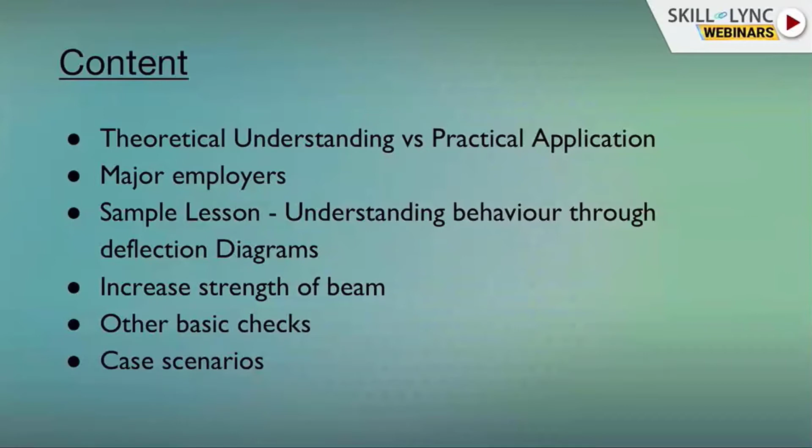So what you go through in the exam syllabus is really very different from what is required in industry. In exams, you get a simple portal frame, you get the loads on it, and you derive forces.

Whereas in structural engineering, you will need to create the geometry first. You need to understand the loading pattern, and create a geometry which is more efficient in transferring the load. It is more about understanding physics, because all the calculations will be done by software like StaadPro.

For superstructure and for foundation, we have Mat3D and various other software. So what I want you to understand is the approach of imagination and the physics.

In academics, you would have learned methods like the slope deflection method, moment distribution method, and Kani's method. I'll tell you straight away, none of these methods are used in practical application. What you need to understand is the basic concept of how every element behaves, how it responds to loading, and how load transfer happens.

So this is what I'll be covering. I'll at least try to clarify the basic approach. Of course, I won't be able to go into detail in these 45 minutes.

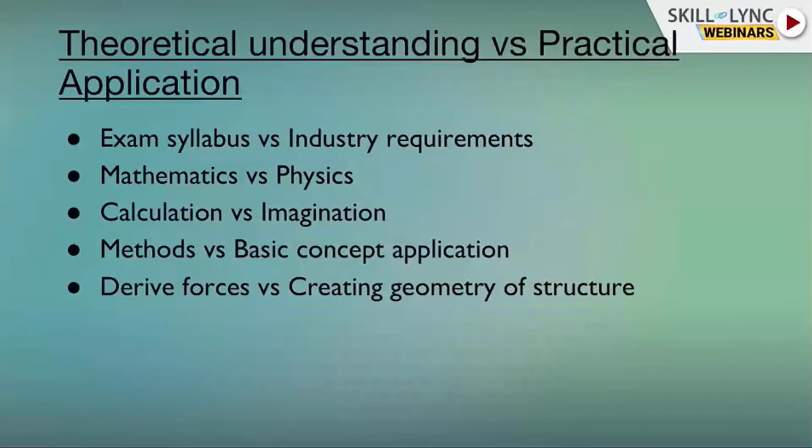For employment opportunities, I'll share the relevant industries first. I'm from oil and gas onshore. There's an offshore division as well, which is a very niche division for structural engineering.

Out of all the sectors, offshore oil and gas structures give you the opportunity to be the dictator as a structural engineer in deciding the whole engineering plant layout. In onshore, piping and mechanical govern what comes where, whereas in offshore it is a very specialized structural engineering branch, and structural engineers decide what comes where.

And there are around 10 to 15 different kinds of analysis, which are dynamic analysis. Going forward, we have the power sector, that is the coal and energy sector.

We have pre-engineered buildings, which are basically your warehouses and industry sheds used for storage, and even oil and gas onshore or the power sector can use those. We also have residential and office infrastructure, and miscellaneous infrastructure like stadiums, malls, high towers, and telecom towers.

I'll just list a few major employers: L&T Hydrocarbon, from where I belong, L&T Power, L&T ECC, L&T Heavy Engineering. We have the Reliance Group of Industries, Shapoorji Pallonji, and Afcons, which itself is a big conglomerate and is just a part of Shapoorji Pallonji. We have many opportunities in Afcons as well.

So this is the deflection diagram of the beam. What is happening at the column-beam junction? This is the 90-degree angle which existed before loading, and the connection will try to retain it as such. When it is bending, the column will try to deflect outwards.

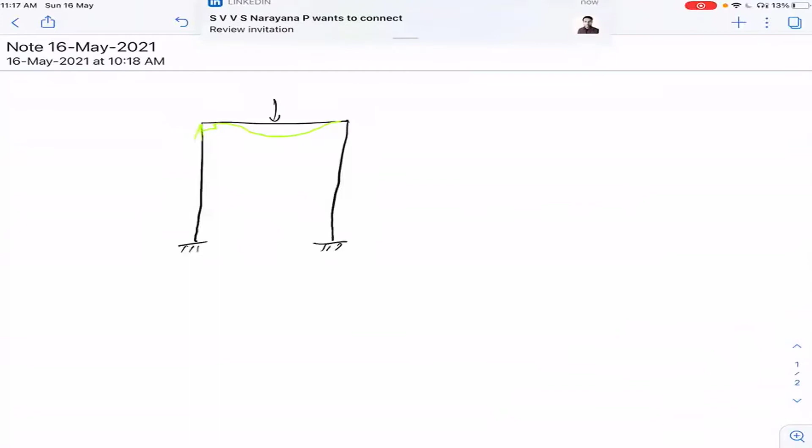Why so? Because this 90-degree angle is being distorted by this force. So the column will try to deflect outwards, and the beam will also try to deflect outwards just to try and retain this 90-degree angle.

Similarly, when we go to the fixed joint, this column is already trying to rotate outwards to retain this 90-degree angle, but we have a fixed connection here as well. We have to retain the 90-degree angle, and this will create a negative moment at the column-support junction, and symmetrically here. Okay, so we'll try to draw the moment diagram.

Of course, we have this part. Since it will try to rotate like this to retain the 90-degree angle, we have some negative moment at the end. We have a similar negative moment transferred to the column and the support. Very simple approach to draw the moment diagram, right?

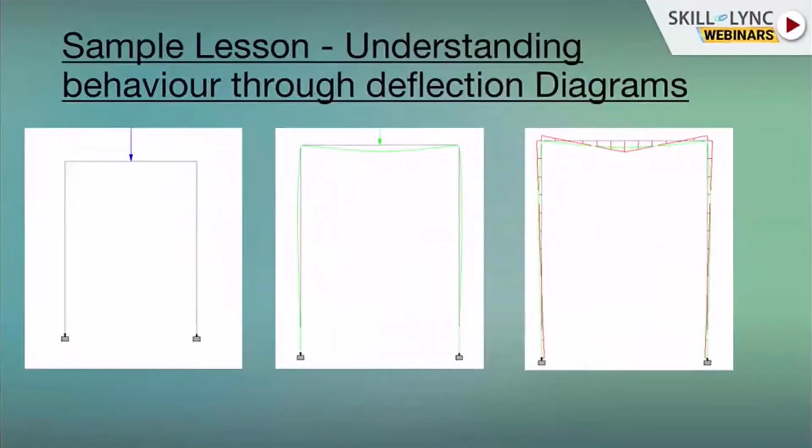Okay, so moving on to the next example. If you have any queries, we'll solve it after the end of the presentation.

I make a slight change. I shift the load towards the left of the CG. The CG of this frame would be somewhere here. Earlier the load was here, now I have shifted it here.

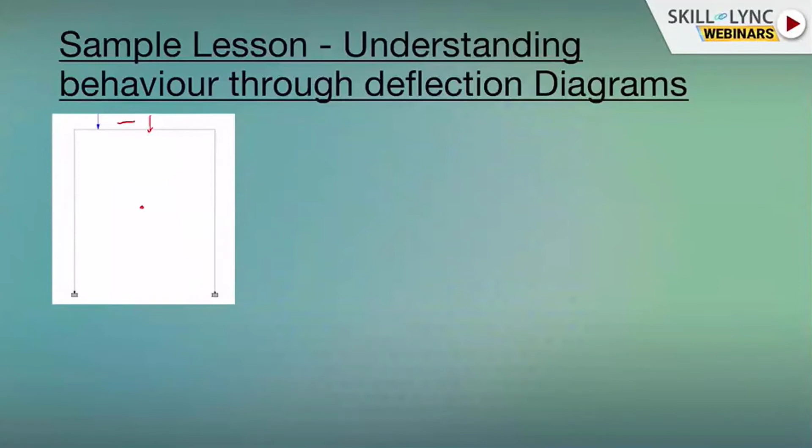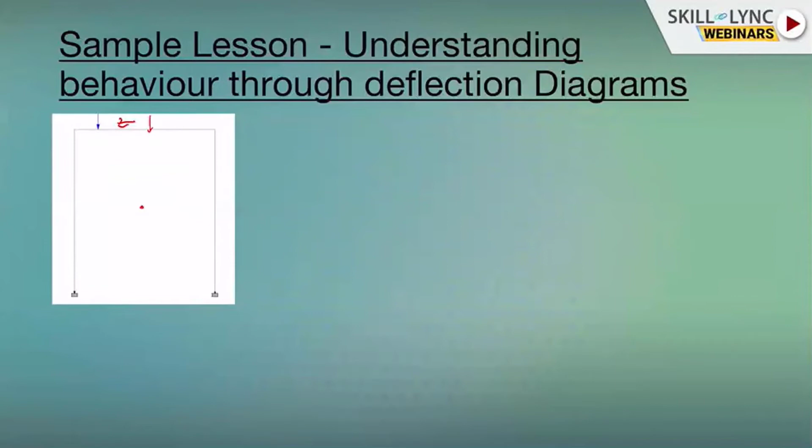Now just draw a deflection diagram. Even if you don't wish to draw the deflection diagram, it's okay, just let me know how this frame will sway. Will it sway at all? Because it's just a vertical loading. If it will sway, where will it sway? Will it sway towards left, right, or not sway at all?

So these are the three options. Jen, is it possible to have some responses from the participants on this, on Zoom chat? I just need a quick kind of poll: left, right, or no sway. And if possible, just let me know roughly how many are left, how many right, or how many no sway. What are the answers from the participants? Because I'll not be able to see the chat when I'm sharing the screen.

So Anmol, Mr. Praful says it's right. Okay, and a few more are saying it's left. What are the more number of answers, left or right? Okay, Mr. Shubham says it's no sway. No sway, okay. Which are more number of answers, left, right, or no sway? Okay, exactly right. Approximately, it's coming to right? Yeah.

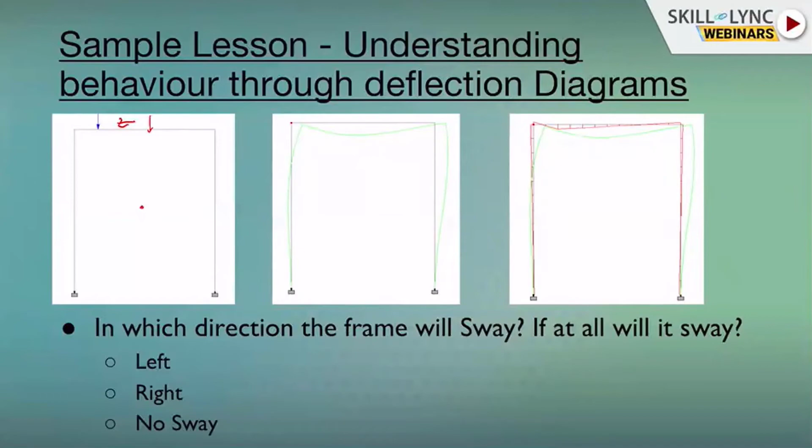Okay good. So it will sway towards right. For those who have not gotten the answer, I'll walk you through it. So the answer is right, it will sway towards right. Now let me just tell you the approach, because people are not able to understand how to approach it.

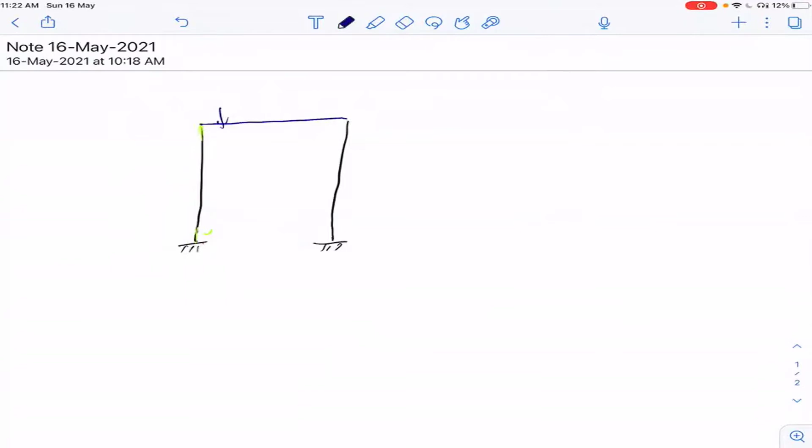So we have shifted the load towards left. Now, sometimes it seems that it is to the left of CG, and that is why the frame should sway left, but that's not actually what happens.

I'll tell you how. When the load is shifted towards left, the first column to receive this load is the left column. This column will take more of the load than the other. This angle will be distorted more, and it will be resisted more.

If I draw a free body diagram, I separate the left half and right half. This will make the left column bend towards the right, because it will act as a cantilever. For the right column, the loading will be less.

Ideally, if it's just this column present, this part will bend towards left. But since the loading is closer to this column, it will be the first to react. This deflection will be higher than that deflection. Hence, the whole complete frame will bend towards right to minimize the internal forces.

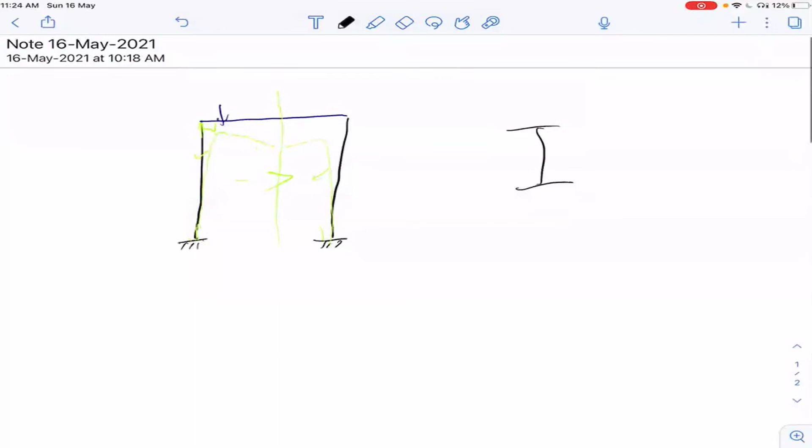There are two ways to increase the beam size: either increase the weight, which increases the thickness of flange and web, or increase the height and decrease the thickness of flanges and webs so they remain of equal weight.

But how does this help? It will increase the moment of inertia. We have the A Y-squared component for moment of inertia, and the more it goes away from the center, the higher the moment of inertia.

This is one way, but what if we have a pipe going below it and we cannot increase the beam size? The top level is usually fixed, so we cannot increase from that point either. The second option we can look towards is adding plates. Now, where to add the plates?

This is the beam. There are three options: I can add a plate here, here, or here. Let me mark these options A, B, and C.

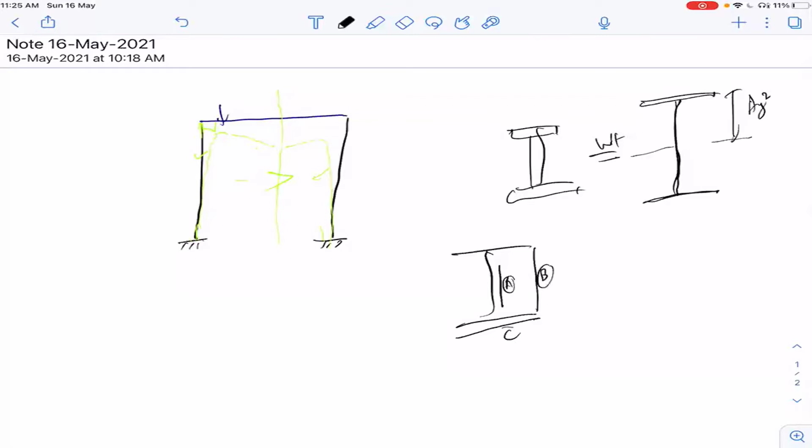When I add plate A, it will increase shear resistance because it acts along the web in the vertical direction. So whatever the forces are, if it's crippling under shear, it will increase the strength of the beam at that particular junction. If a load is here, we might just add the plate on the web in this segment only, not throughout the length, or near the supports where the reaction will come.

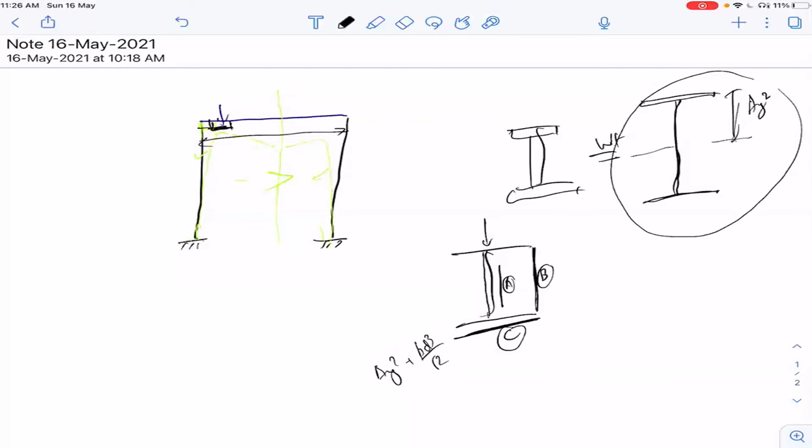If I add a plate here, it's not much use for bending about the major axis. If I add a plate here, that's what will help me - it will increase the moment of inertia similar to the earlier example, adding one more element: BD-cubed by 12 plus AY-squared. So if I add a plate here, it will not add to the moment resistance about the major axis - it will add resistance about the minor axis.

So let me take a different color. This is the minor axis. If I draw the top view of this, and a load is acting this way, there are horizontal forces. It will deflect like this - this is where plate B will help.

For the major axis, we have to go with plate C. For shear forces, we go with plate A. But sometimes, again, there may be a location constraint, and we might not be able to add the plate.

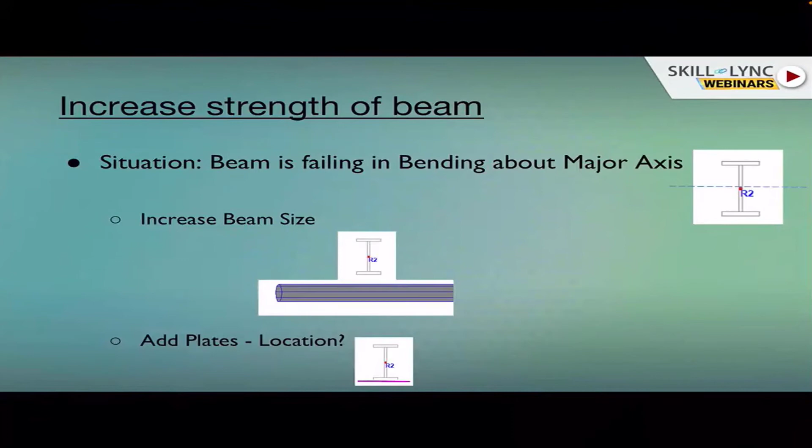So what's the other option? We can decrease the unsupported length by adding a bracing - this is called a knee brace. The moment for a uniformly distributed load is WL-squared by 8. If I decrease L, then I'm decreasing the whole force by L-squared. So if I add a knee brace, it will decrease the moment and the beam will pass.

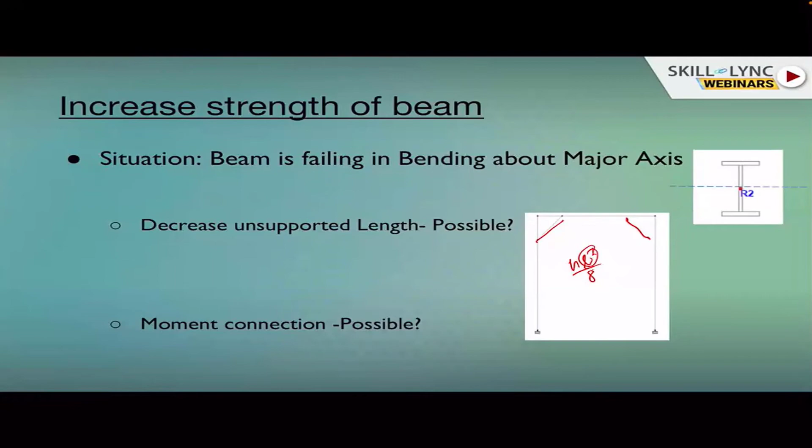Is a moment connection possible? We have already discussed moment connections, but what if we have a pin connection? Rotation is allowed, right? Now, if there's a load here, the moment will be like this. But if I make a moment connection - the universal symbol for a column-beam moment connection is this.

In the drawings, I'll try to make it separately here. This is a universal symbol for moment connection. So if I create a moment connection, this whole curve will shift towards the top, right? It will also transfer the forces to the column, which participates in this transfer of internal forces, and it will decrease the moment on the beam, which we can pass later.

Now, how will this help in vertical load transfer? This horizontal bracing is not in the same plane as the vertical load - it is in horizontal direction. Any answers? Please let me know, 2 or 3 from the participants. Why is this happening? How will this horizontal bracing help better transfer the load - not better transfer, but increase the strength of the beam for vertical loading?

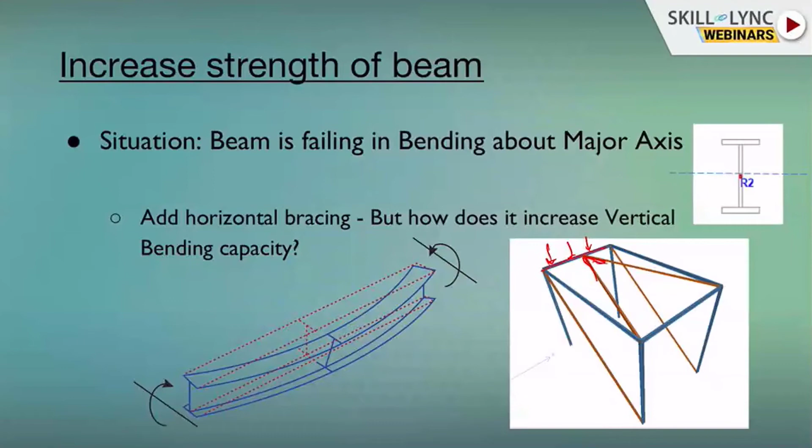This beam is not laterally restrained from any point until I add this bracing. Now how does this actually happen? What is the concept of a laterally restrained beam? When a beam is bending, the moment is like this - there's the top flange, the bottom flange. This will be in compression, this will be in tension.

So in compression, any element, whether it be a column, a part of a column, a beam, or whatever, it will fail first through buckling. What is buckling? I hope you remember - if there's a force here, it will not crack immediately. It will first buckle, and that is where the failure mode starts.

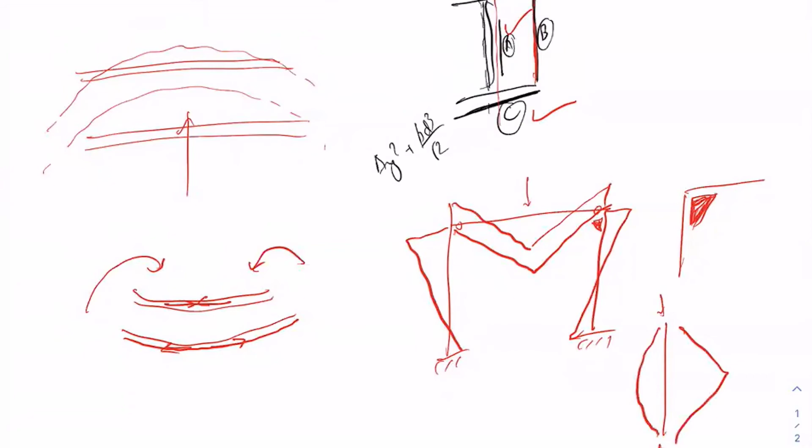So only the compression flange comes into buckling, and what happens is it tries to bend torsionally also. Because of buckling, this beam tries to move torsionally too - that is why it is called lateral torsional buckling. And when we add this bracing, we are restraining this top flange.

Now in industry, there's a very important point. Sometimes people add bracing here - this is the gusset plate - because there are many other beams going on, and it is difficult to pass. Sometimes they prefer column-to-column bracing, end-to-end bracing, and so they bypass all the intermediate beams through the bottom and connect it to the tension flange. This will not help in restraining the compression flange - this is very important to note.

So you have to try to make the connections through the top flange only. Then the beam's slenderness ratio about the minor axis will decrease for the compression flange. There's one more innovative way, not written in codes, which is sometimes misunderstood. If you don't have space and you're adding bracing at the bottom tension flange, just add a stiffener - it will help the compression flange and tension flange work together, behave together, respond together. So if there's lateral torsional buckling, it will pass this force and have a reaction from the bracing. Very crucial point, which many engineers miss, even senior engineers.

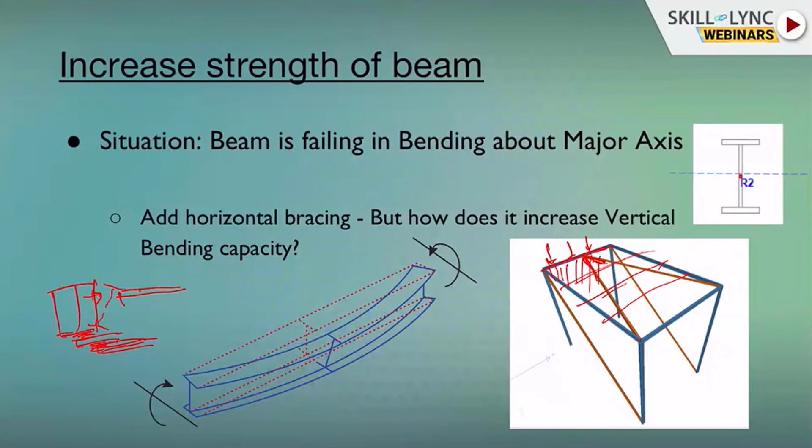So I'll just walk you through the other basic serviceability checks which are usually there. That is a deflection check.

These two clauses are from the IS 800 code, but it is more dependent on the design specification of the project or the client. Usually we allow height by 200 deflection in industry, and L by 325 as vertical deflection.

For gantry girder it is more stringent, mostly we use L by 750. We need to minimize the deflection. Gantry girder design is a bit more specific, which we can take up a bit later.

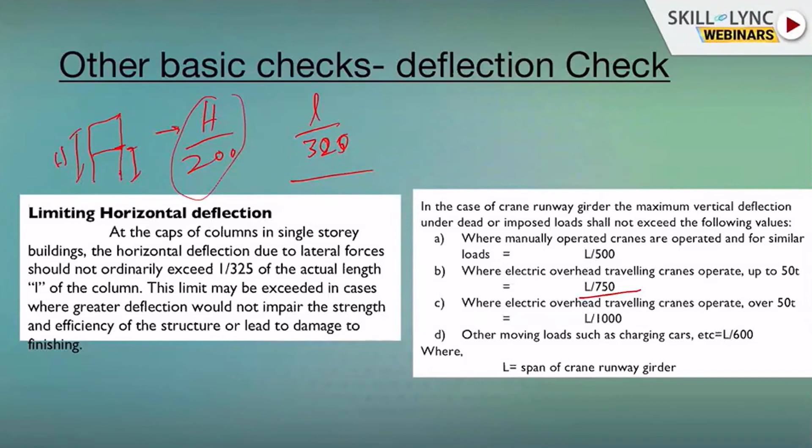The slenderness check is also one of the design parameters in STAAD. Most commonly used values are 180, 250 and 400. 400 is by default for tension members. For any compression member, because buckling is the governing force, we take 180 as allowable KL/R.

For beams, if there are horizontal loads apart from wind and earthquake load, then we have to take 180. If the horizontal forces include only wind load and earthquake load, then you can take 250.

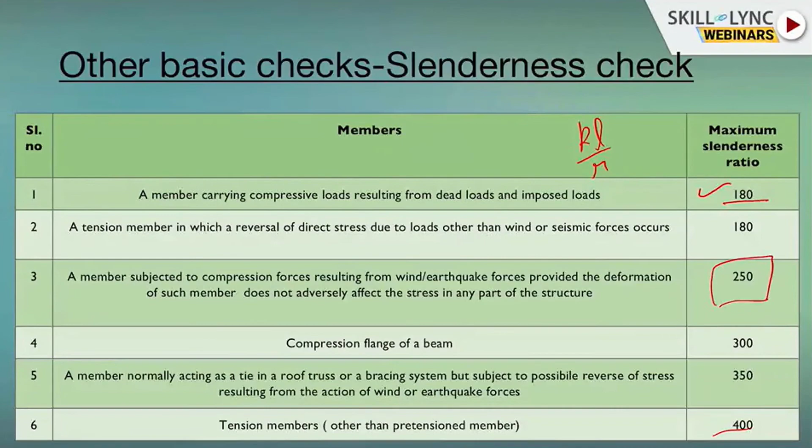So I hope you understand the slenderness ratio when you are finding the unsupported length. You are giving a K factor, or unsupported length factor, in STAAD as a specification and design parameter. You have to understand the end connections.

Suppose, let me remove this joint and make it a beam. Suppose it's a fixed connection, this is a fixed support. This could be 0.8.

If it is a pin, if it's a cantilever, then the deflection will come something like this, so the unsupported length becomes twice the L. So if there's this complete restraint, only then it is 0.8.

And if it's a column-beam moment connection, then it varies from 1.2 to 1.5. This 1.2 to 1.5 varies based on the relative stiffness of column and beam. If the column is much stiffer, then for the K factor we take 1.5. If it is near about the beam stiffness, then we can take 1.2.

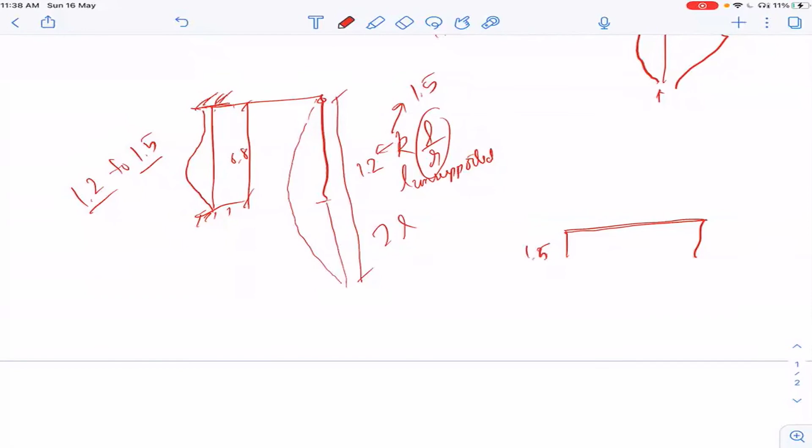This is also very crucial because sometimes the frame is very small. This length is very small as compared to the beam length and column length, and the stiffness will be very high — in this case you take 1.5. Only when the end part is completely restrained as a support do you take 0.8 or 0.7. These are very basic concepts you need to know.

I'll just take you through a couple of case scenarios which are building blocks of a frame. I'll tell you how we play around with bracings and column orientation when we are passing a structure. So if there's a load here, this is a portal frame.

This is a portal frame, and these two frames are joined by bracing. Now the orientation of the columns here is like this, right? They don't really have moment capacity in the minor direction — that is where the bracings come in.

Here the moment will be only in this direction, and the shear force will be, of course, in both directions. Additional force could be tension and compression due to this bracing. But of course, you need loading in this direction also.

What could be the other way? We could just add a small bracing here, which helps transfer this load. It will still be a frame with column orientation like this, but you can make this a pin connection instead of a moment connection — here we have moment connection as a portal frame. Here it will decrease the forces on the column, it will reduce the column size.

What will be the addition? That is the bracing weight. So you are reducing the column size by adding the vertical bracing. This could be more optimized than this — who knows, you have to see which works best for your structure. This is where hit and trial comes in. Another case scenario.

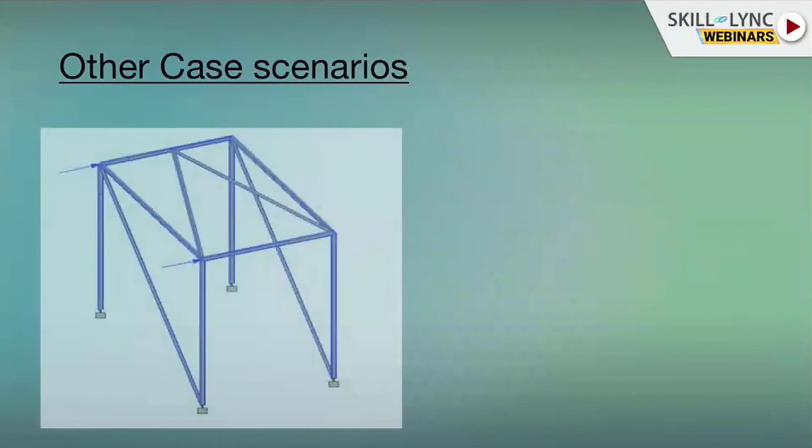I change the column orientation to like this, from like this. Add the bracing here, and now the horizontal forces are getting transferred through bracing. There's no horizontal force here in this direction, so the column size is less, even though this is a bigger portal frame if we consider from the size perspective.

What other things could you do? You could make it a pin connection between column and beam, it will further decrease the size. But if there's a loading coming here, then you need to see which is more optimized again, either the bracing part or the column orientation along this axis.

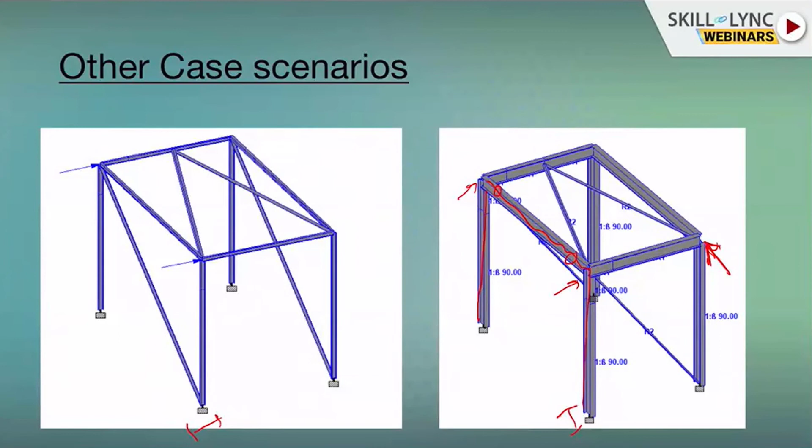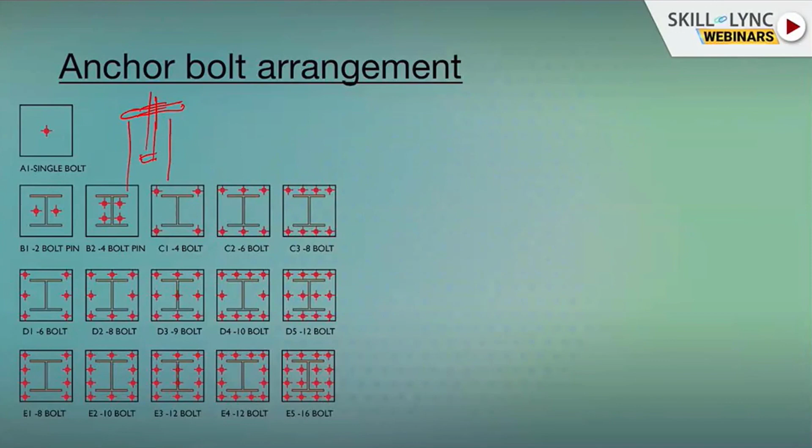So now there's one more building block of the structure, that is the anchor bolt arrangement. Anchor bolt design is so complex that the whole appendix is there in ACI 318, appendix D. There are 4 kinds of cases, each for tension and shear for anchor bolt arrangement, because there is a concrete and steel interaction which is pretty complex. The load transfer from steel column to concrete column is pretty complex.

There are different kinds of failures - breakout, pry out. Maybe concrete will fail earlier than the anchor bolt made of steel itself. This is pretty complex, but I'll not go through that concept now. What you need to know for interviews, for gaining entry in this field, is what I'll discuss.

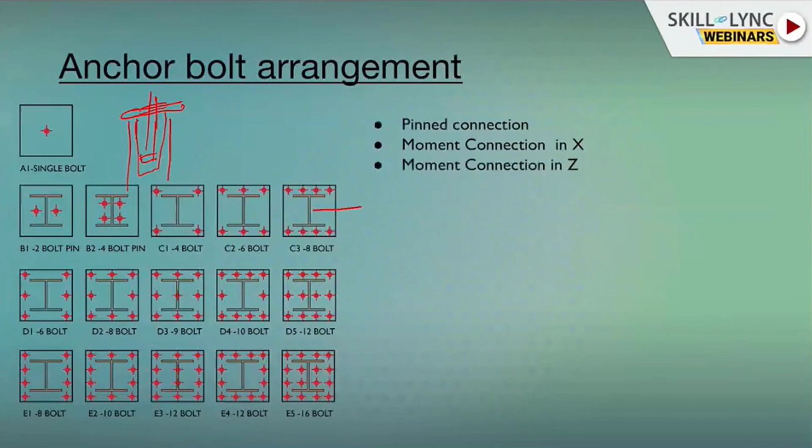So there are various kinds of bolt arrangements. Some of these will be pin connections, some are moment connections. Some of the moment connections, around one axis, are partial moment connections, or fully moment connections. If this arrangement has no bracing, then this could be a moment connection in both axes, because these 2 anchor bolts will participate in transferring the moment. But if this bracing is here, then this will become a simple pin connection in this direction, and these bolts will take the moment only about this direction and not about this direction.

What could be the forces? Of course we have shear force. For any column, we have shear force in X or Z. The resultant, square root of A square plus B square, will be transferred to all these 4 bolts equally, because they have equal capacity.

We sometimes have pure tension. This is a frame, we might have it as a fixed joint. If any force is coming here, this support will only have tension forces, and this will be transferred to all the bolts equally.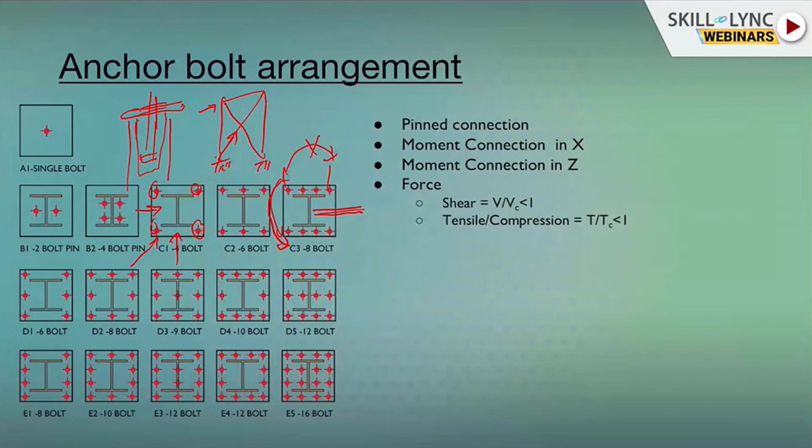Again, very simple, but there are moment forces also in a portal frame. To resolve the moment forces, what is the simple criteria? We have to take the lever arm from bolt to bolt and apply this formula: M by D, moment divided by the lever arm, to get the force. When you have many bolts, you take the polar moment of inertia to resolve it.

So in here, one bolt will be in tension, the other may or may not be in tension. This is the bolt, now the moment diagram might be such that this force distribution could be like this, but this part comes in compression and the bolt will not participate - it will be taken by the concrete pedestal here. But it could also be that the forces are so high that this bolt also comes in tension, and this bolt also comes in tension. This bolt will be critical because it will be carrying higher forces.

So this is also resolved in tension, and we have the formula: shear force by shear capacity should be less than 1. This is after factor of safety on both load and design. Tension over tension capacity should also be less than 1. When combining these forces and checking the combined capacity, we take the square, and it should be less than 1. According to design specification, the formula could also be less than 1.4.